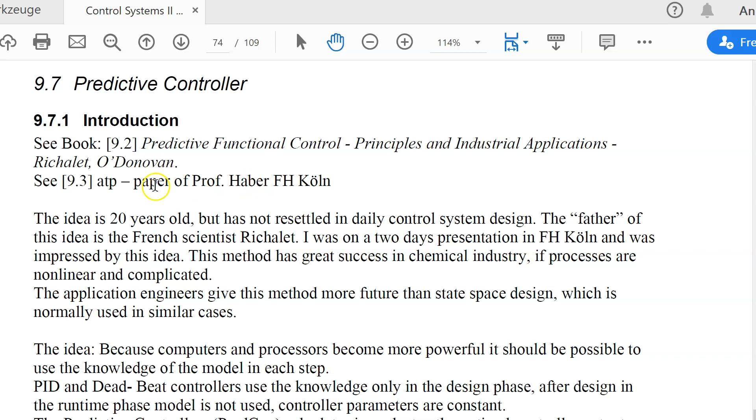If you are interested to step deeper into the details, just take the book of Mr. Richalet. A short German paper was then published by Professor Haber, who was the leader of the control systems section in the FH Köln. I can give you a copy of this paper. The idea is very simple and impressive.

It comes from the fact that computers, this is done with a digital computer, are more and more powerful in the last years, and they can do much more calculation work in much less time. So we have powerful microcomputers, and the idea is to use this power in each step, in each sampling period, to optimize the controller behavior by using, and now the basic idea, a model of the process. You need a good model.

That is the industrial process, the analog one, still the position control, temperature control, what else? This is the physical output measured by a sensor. Try to find a very good fitting model in F of z. So this should be a step response invariant system, or identified with one of the methods I described in chapter 8.

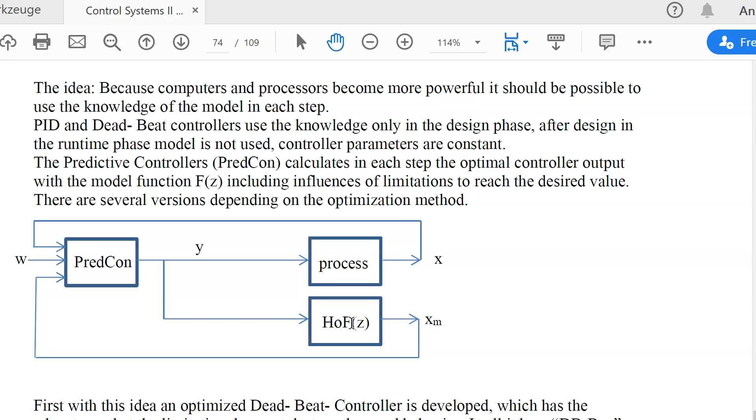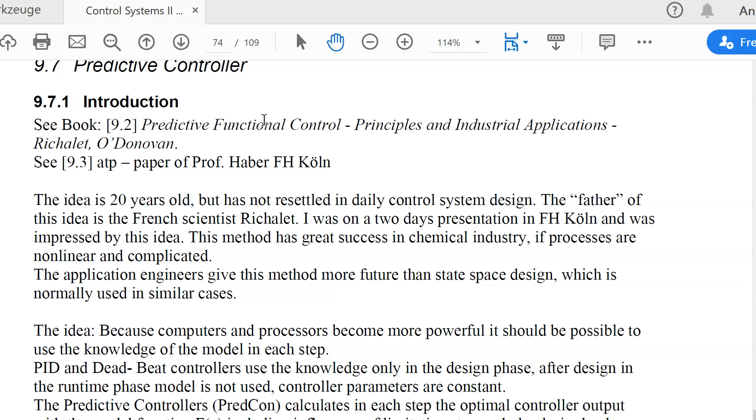In my first version I want to present, we look into the future, depending on the degree of the process, 5 to 7 steps. In the Richalet version of predictive functional control, we can decide how many steps we want to see into the future. So we can use this model and calculate 1,000 steps into the future with our controller output.

If we have found a good y to get good xm's, then I send y to the real process, wait for the next step, get feedback to my controller algorithm of what is the real x value, get back with the given y what is the model xm value, and put all this knowledge together to calculate the next y value to get optimal output. So in each step we try to optimize the y value using the model.

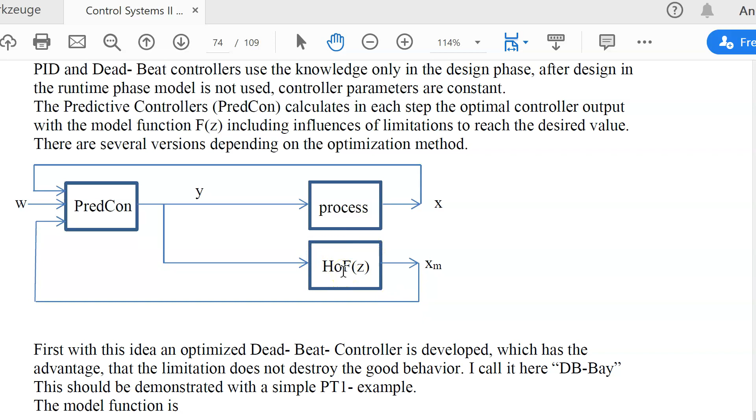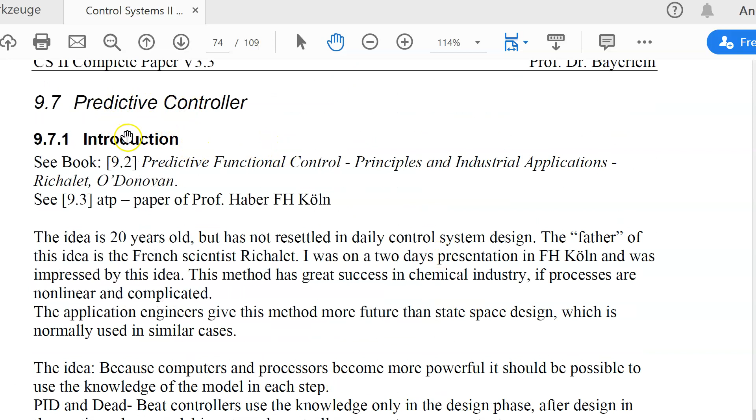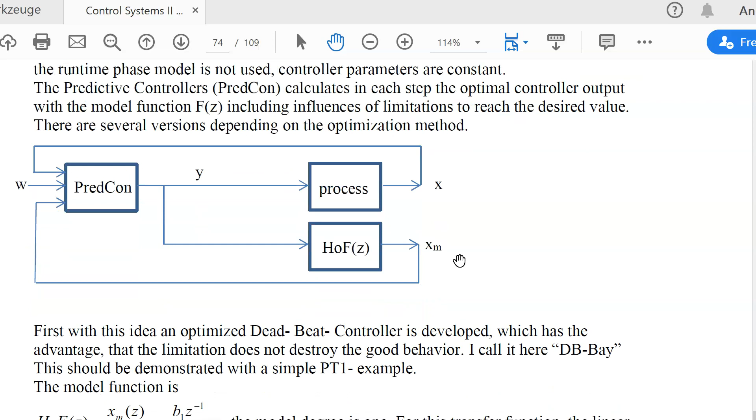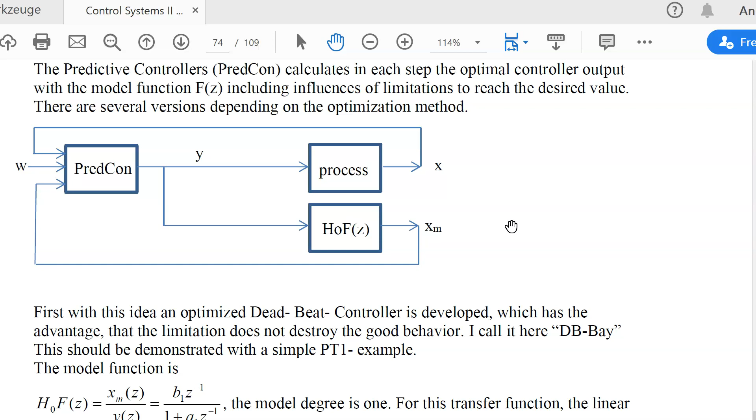I will show you this idea in a very simple example. This is an idea, I like this idea. The predictive controller comes in one of the next chapters. First, I show you how this idea led myself to develop a special version of the deadbeat controller. You will see what happens. This idea, together with the original deadbeat controller knowledge, gives a new type of controller which you will understand, because the manual work through this is simple.

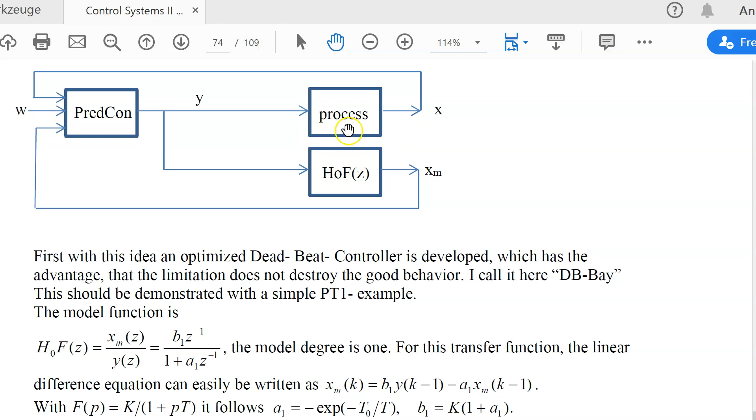So let's assume a PT1 process, and I assume that I have a model. I have the K and the T, so the A1 and the B1 of my model, which are identified, or I know them. So I know the A1 and the B1 of my PT1 model, and this should fit my real process. Then you see here the equation is the following. That is the transfer function of my model. This is the model output, and this is my controller output. The controller influences the input of my model, and this can then calculate xm.

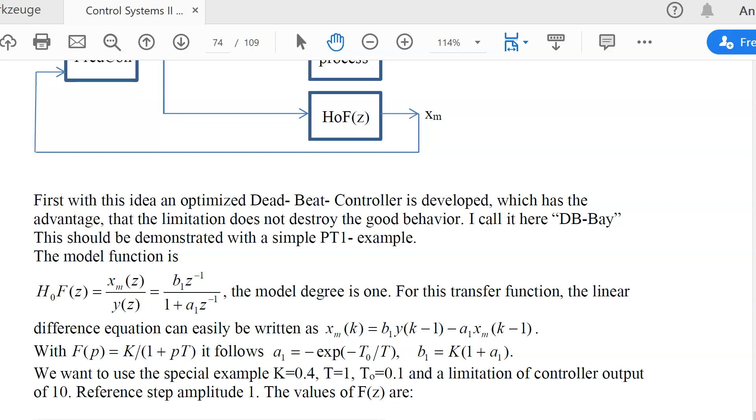So that is the step. Let's do this in manual work on the paper. 9.7, predictive controller with PT1 example.

The PT1 example leads to a model which is the step response invariant type of model. So we have model output, which is just a copy of the equation of my paper. You will see y of z is the controller output, and this gives b1 z to the power of -1 divided by 1 plus a1 z to the power of -1. Model degree is 1, is clear, and we can now convert this into my algorithm.

The model output at position k can then be calculated. This is b1 times y of k minus 1. b1 is a numerator time constant. z to the power of -1 means one delay, multiplied with the input of my model. My model, I should indicate this with an M, is H0 F M of z. Y is the input, and X model is the output.

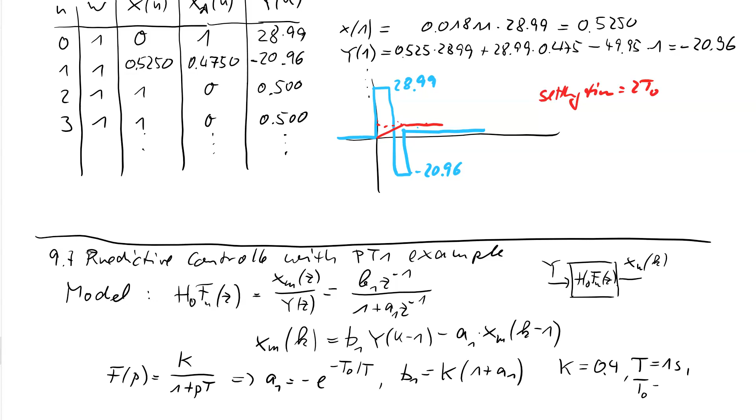In our example, I want to use the following values. K is 0.4, T is 1 second, and sampling time is 100 milliseconds, 0.1 second. This leads to values of a's and b's. Now I can calculate a1. a1 is negative 0.9048, four significant digits are enough, and b1 is 0.03807. So with these a's and b's, I can calculate model output depending on controller output one step in the past.

Now the idea is the following. Now I calculate the model output one step in the future. One step in the future means with my model I can look into the future. I can now calculate xm of k plus 1, xm of k plus 2 and so on, depending on controller output. So I can look with my model into the future. That means here I have b1 y of k minus a1 xm of k.

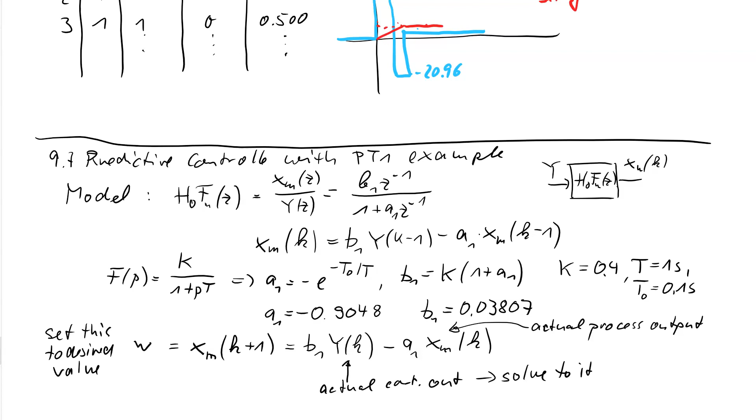And I think you see this could not be so difficult now to calculate this equation with the given values. That is my desired value, which is known. That is the b1 coming from the process. That is my actual controller output I want to calculate. And this is the actual process output. So I solve to y of k. This gives y of k is, in the numerator, w, desired value, minus a1 times x of k, actual value of x, divided by b1. That's all. This is the calculated output of the controller.

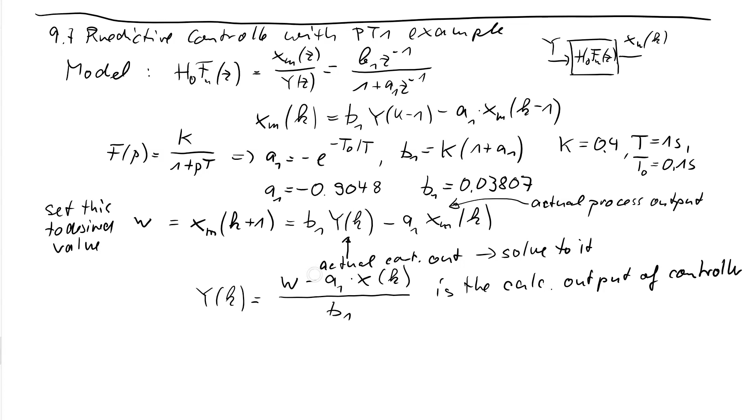And then if I calculate this, you see the control difference is not used anymore. This control algorithm needs the value of w and needs the process value. This is not the control difference. w minus x was the control difference. So this is a difference to previous controllers. The predictive controllers need information not only of the control difference, but on the desired value and on the control value. Okay, let's make just an example.

Say what happens with reference step response. Now we can, because this is simple numbers, calculate the values step by step, which we reach if we want to have reference step response. W should be 1. We assume that we have 0 initial conditions. It's clear. All signals, if we start, should be 0.

And here we calculate the y of k. Oh, this is k, sorry. This is k, y of k. And let's start with k0. Y of 0 is, now I want to have the 1 here, minus a1. Sorry, minus a1? No, sorry, minus error. This has a negative sign. This has to be put to the other side. Sorry, I have a plus sign here. Doesn't matter. I found the error, so I have corrected this.

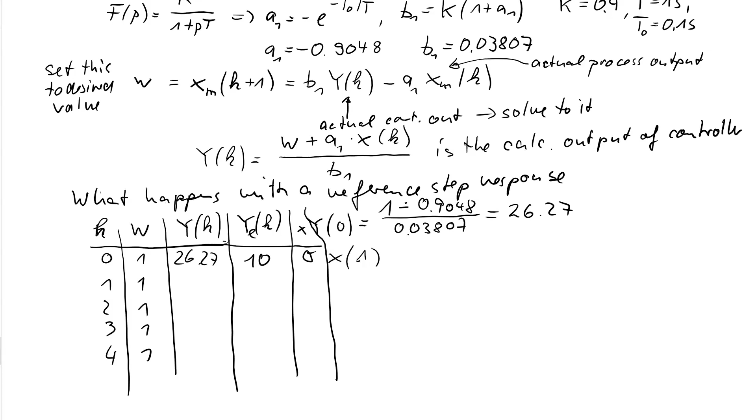So what is the process now doing? The process can be calculated, x of 1. Here we need a last column. Sorry for this. x is 0 here, of course, 0 initial condition. The x1 now can be calculated with my process model equation. If we assume that the process behaves like my model, then x1 is b1 times y of 0, and this was 10 volt, minus a1 value times 0, because the value xm of 0 was 0.

So we know this is B1 times 10. B1 is 0.03807. So this is 0.3807 is the value we reach after one step. Now we continue with my calculation. I measure my actual control output. I measure my actual process output for the next step. And I can calculate y of 1. Now this equation calculates my new controller value.

Y of 1 is 1. Desired value is still 1. Plus A1, 0.9048 times, and this is now the actual process output. I can use a model value, but also I should use the measured value. Then we have the possibility not to calculate with the model output value, but with the correct measured sensor output value. Then we have a real feedback. Divided by 0.03807, you get the value of 17.22. So the controller wants to reach the desired value in one step, wants to have 17 volt. Gets only 10 volt. So I can calculate now the x2 value.

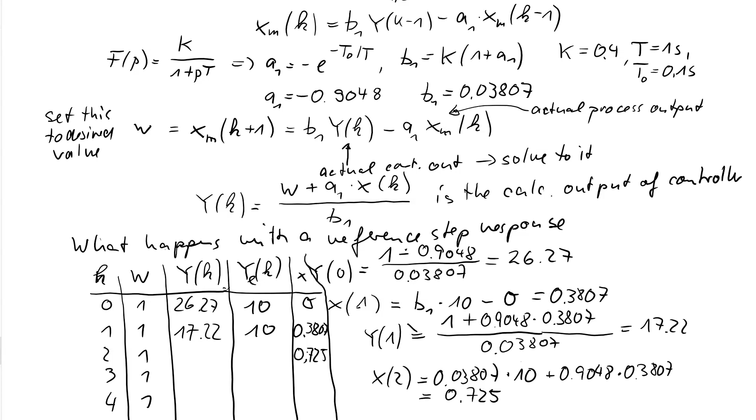And now we get the last step. You will see what happens. Now I can calculate with my model, with my prediction. I calculate y of 2 is 1 minus 0.9048 times 0.725 divided by 0.03807, and this value is 9.035. The controller wants to have 9.035, and this is less than my limitation, so the controller gets this value 9.035, and you will see what happens after one further step.

The x3 value is how large? It is 0.03807 times 9.035 plus 0.9048 times the last value, 0.725. And this, if you put all numbers into your calculator, should be 1. So with the last step we reach automatically 1, and now y of 3 is calculated: 1 is the desired value,